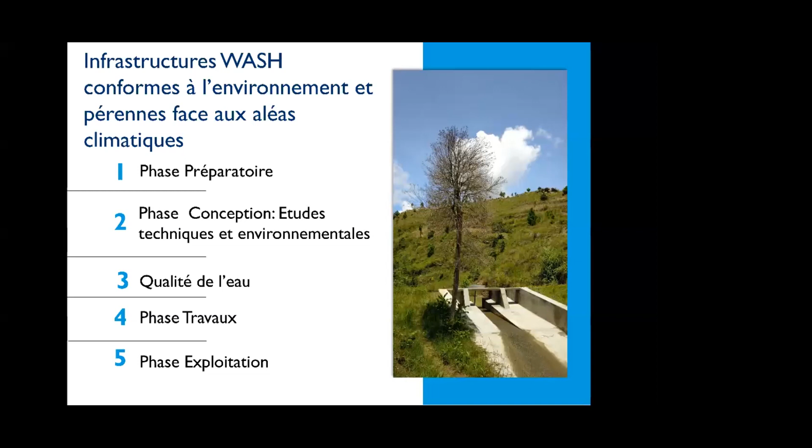So why those different phases? I'm going to share and work on this, because my colleague can also give more details on the question of how. So to implement this phase, we have to base our work on a reference document.

Since we are a project funded by USAID, and the mission of USAID is to advocate for sustainable development, our objective is to ensure that the project is respectful to the environment and its sustainability. More especially, USAID is legally required by the federal regulations to apply those environmental norms for the overall projects, programs, and activities.

That's why we refer to those key documents. And then we define common criteria for the selection of the communes and the communities, to have an idea of the different economic steps and stages, the volunteer willingness, the ability to pay, as well as the availability of water resources. In this phase, we constitute the register of the enterprises and the communes who are accepting the market-based approach, paying for services, and the principle of PPP win-win.

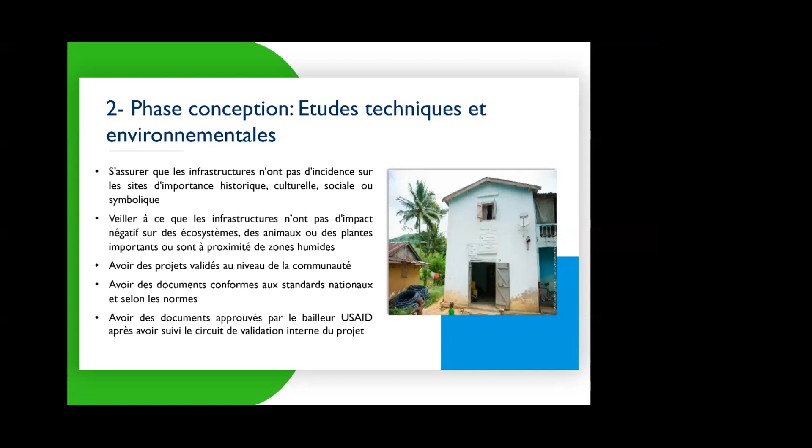Regarding the water quality, RANO WASH engaged to distribute quality water, and that means that the water distributed by those to be placed infrastructures should not have negative impacts on health. The water should be good looking water, and that's why RANO WASH committed to put in place infrastructures to ensure the distribution of water in good quantity and good quality based on the existing norms.

The works phase. RANO WASH is providing support to the communities via the construction of new infrastructures that is adapted to better sensitize and to inform them about the regulatory texts, the rules, and the procedure of usage of those infrastructures. We also have discussions on the mitigation measures of the impact of the implementation of those infrastructures.

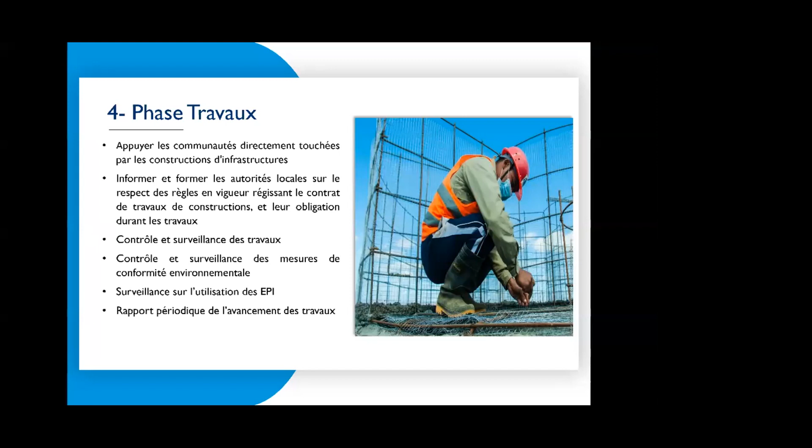During the exploitation phase, that we can say the management phase, the management and maintenance phase, RANO WASH has done some systematic monitoring of the implemented infrastructures to make sure that those infrastructures are remaining in conformity with the environment and the sustainable norms.

So to maintain the environmental requirements, there are the responsibilities of the managers to do some reporting on the uses of those infrastructures, and more especially, they have the obligation to do some improving works on those infrastructures. And it's the responsibility to fence those infrastructures to protect them.

During this exploitation phase as well, the respect to the environment in the watershed is translated by the collaboration with the community and the users of those systems. So they have to ensure reforestation activities, to inform the communities and the users of the lands on the protection of the watersheds, and to inform them about the management plan as well.

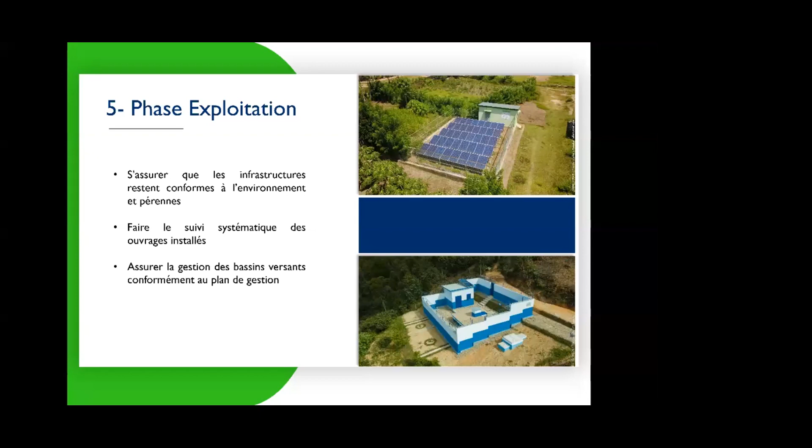On this second part, we're going to share documents and tools used by the project from the preparation phase. USAID is taking into consideration the environmental risks to strengthen resilience of the community, and the assessment process of this risk is IEE, or Initial Environmental Examination. USAID is using IEE to assess the environmental conditions for a project, a program, a project activity, and to assess the potential impact of those activities on the environment and the community.

IEE is also taking into account the measures of mitigation to reduce, solve, and compensate those negative impacts, and the use of this tool is helping us to make sustainable decisions related to 22 CFR 216.

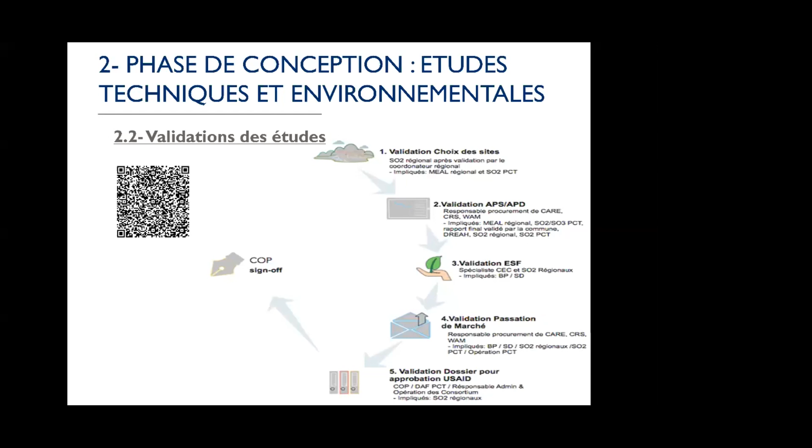And throughout the life cycle of the project, we practice 113 APS and 83 APD, and we can say that most of the necessary documents have been elaborated, and the list of those APS and APD done are available. You can also have a look at them.

You can have a look at those documents on the website. It's also very important that the ESF were done based on climate conditions for the targeted regions, and we can also use them as a reference document if you want information on the management of climate risks and the measures of mitigation to be adopted in the targeted region.

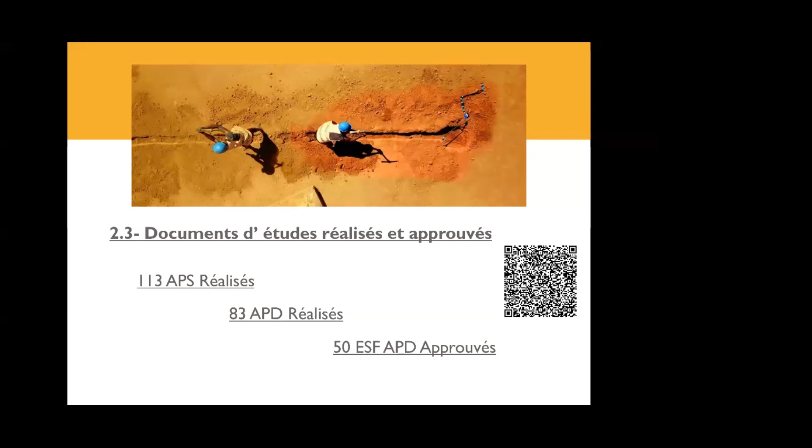For water quality insurance, RANO WASH concentrated on a few parameters described by key reference texts, which conform with different existing texts. These parameters can define the identity of the water and can have a direct impact on the health of the users.

As for the identity of the water, we have parameters like pH, turbidity, and temperature, which are to be assessed at the APD phase, at the beginning of construction, and also at the end of construction.

We also have the ESF, water parameters which are more advanced for the APD phase before use, but also during the exploitation phase. It is to be noted that at the end of the construction of infrastructures, the actors have to evaluate and certify the quality of the water before exploitation of the system.

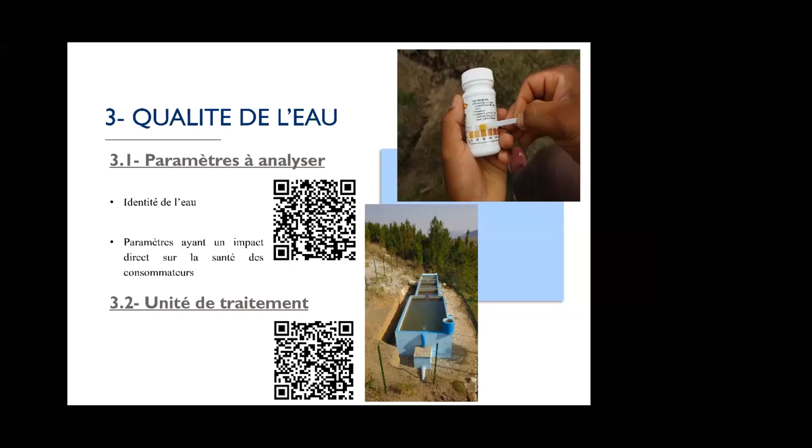During the achievement and monitoring of the works phase, it is important to train local authorities and leaders on the importance of the works, so they can respect environmental norms and the technical descriptions written in the register.

It is also important to take into account security measures for enterprise workers and local communities. This training was materialized by guide documents, which are available on site.

Before the start of works, an introductory meeting is set to inform the communities and to set the roles and responsibilities of each actor, as well as to ensure the respect of social and environmental measures, leading to the best execution of the construction work.

A weekly meeting is held at the workplace, materialized by a report sent to the different stakeholders. At the end of the work, a reception is organized with the different stakeholders, like the commune.

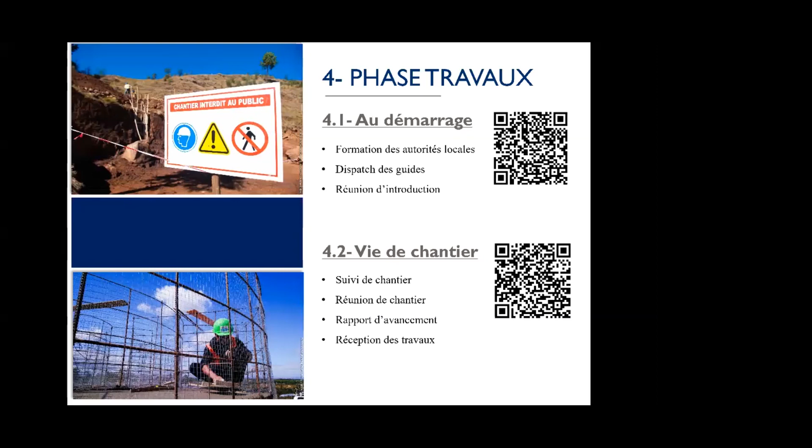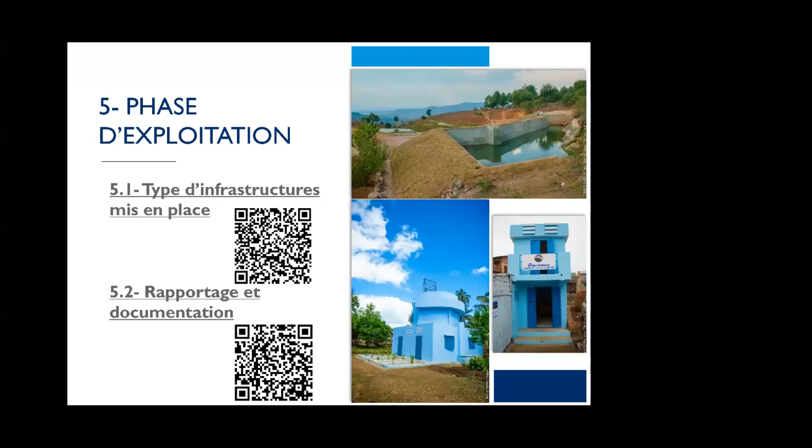So first, to secure the catchment and treatment units, but also the watershed, which is very important, we can see the catchment point in Antsoatany and the perimeter of immediate protection of the resources.

The immediate perimeter is fenced, and the slope landscaping is reinforced with stones. The community also did some reforestation to fight erosion and to increase water catchment in the lands.

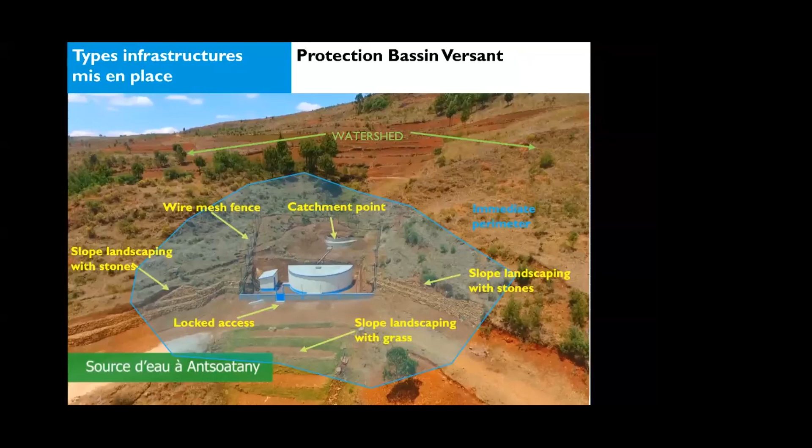All these are stipulated by communal regulations, and activities in those areas have different measures of protection, including the embellishing of the systems, which represents 5% of the investments.

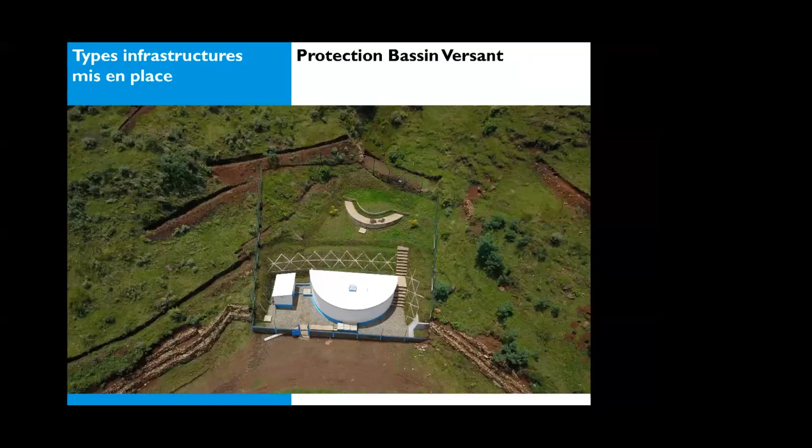We can see on the slide the photo before and after. This is a hybrid dam with half on land and the second half on ferro cement, and this is a hybrid dam of Foulpointe, with a height of 4 meters.

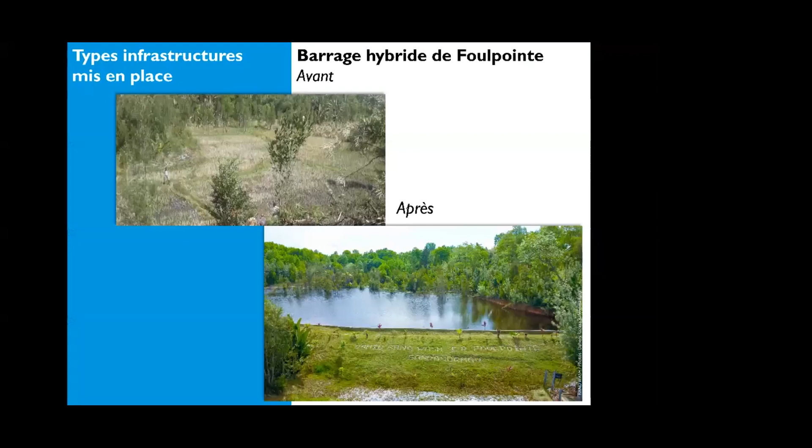This is rectangular and monolithic in ferro cement, can produce up to 15 meters of cube, and can produce considerably more water with some horizontal stones, and these were used in the pre-treatment block.

This is using a chlorination system with the electrochlorator from solar energy. The injection of the chlorine is done with a pump, as you can see on the picture.

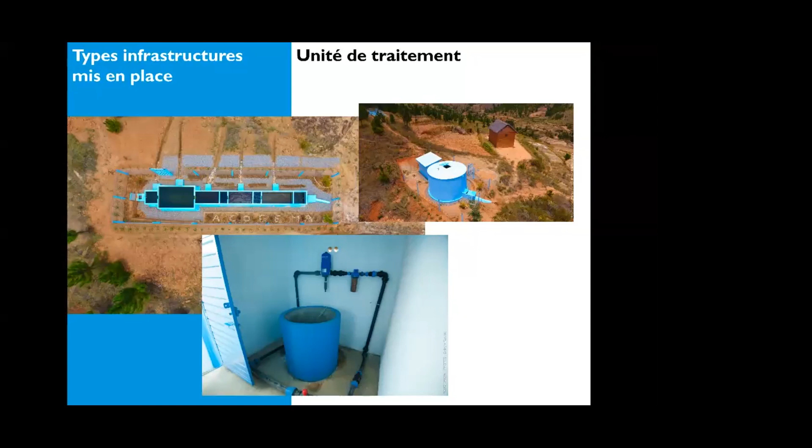So this is specifying the ferro cement because this technique is very interesting to use. Moreover, ferro cement is a system of construction using specific materials like metal or metallic fibers or steels, space steels, as you can see in the pictures.

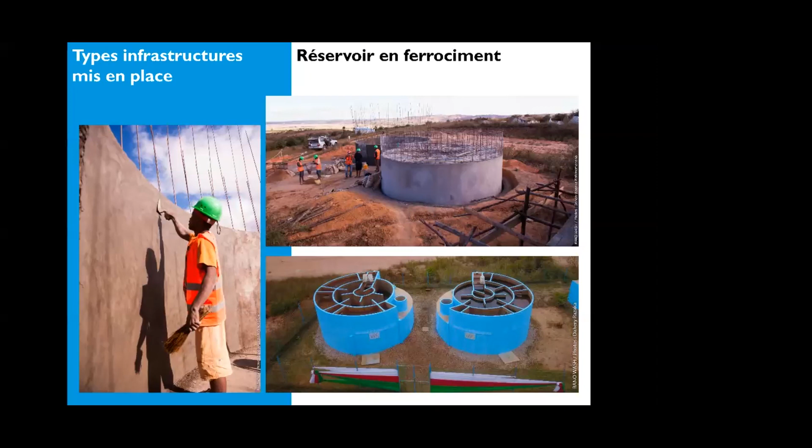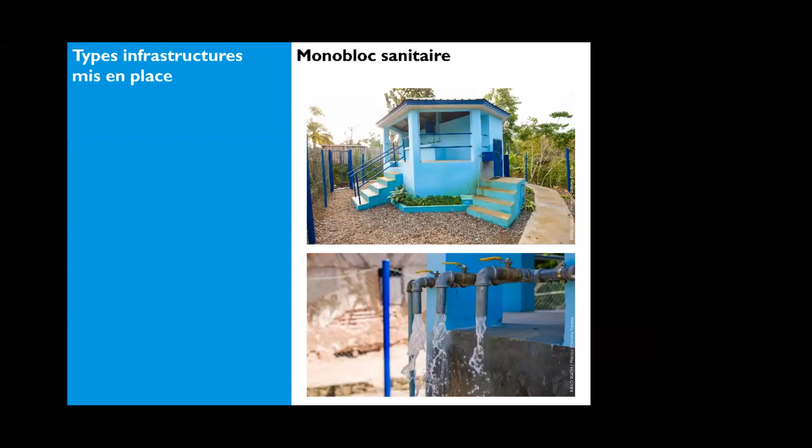Now, let's navigate in the website to have a look at the different tools we mentioned by clicking on the link you can see on the slide.

For example, 2.2.2 on the detailed prior studies for the projects, and by clicking on this APD, you have the list of the APDs, the 83 APDs that we covered, and you can download and use those documents.

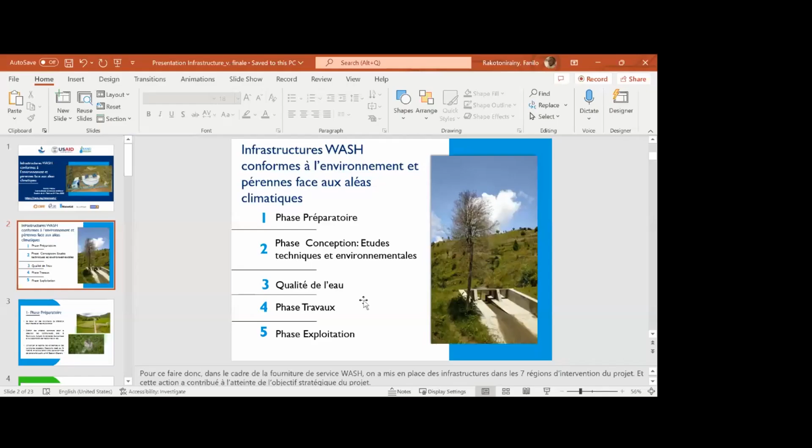Let's go back to our presentation. We shared the tools and the strategies we used during the project.